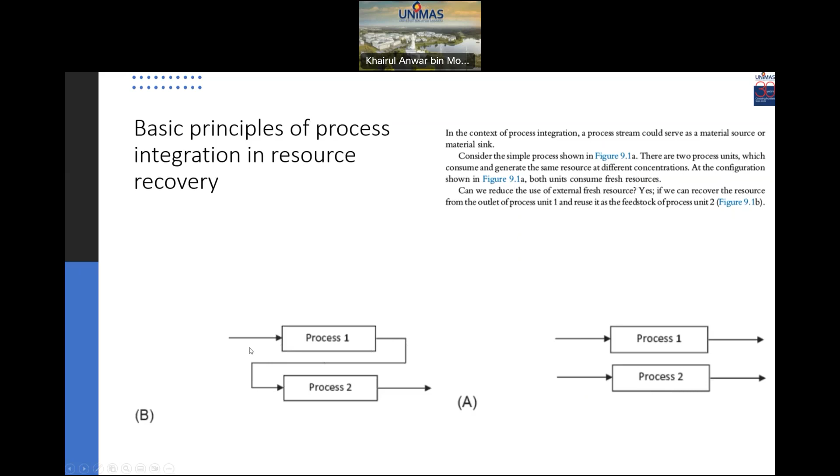Can we reduce the use of external fresh resource? Yes, if we can recover the resource from process unit 1 and reuse it as the feedstock of process unit 2. This process of reuse can result in a reduction of external fresh resource consumption. The inherent degree to which a particular resource can be reused can be determined using mass pinch analysis (MPA). The greater the amount of resource reused within a process network, the lower the external fresh resource required.

Furthermore, a material source stream can also be fed into a regeneration unit to improve the quality of the stream before recycling it or feeding it into another unit, as shown in figures 9.1c and 9.1d. These approaches for resource recovery were first introduced by Wang and Smith in 1994 for wastewater reduction, the principle of which can also be extended to gas and utility systems.

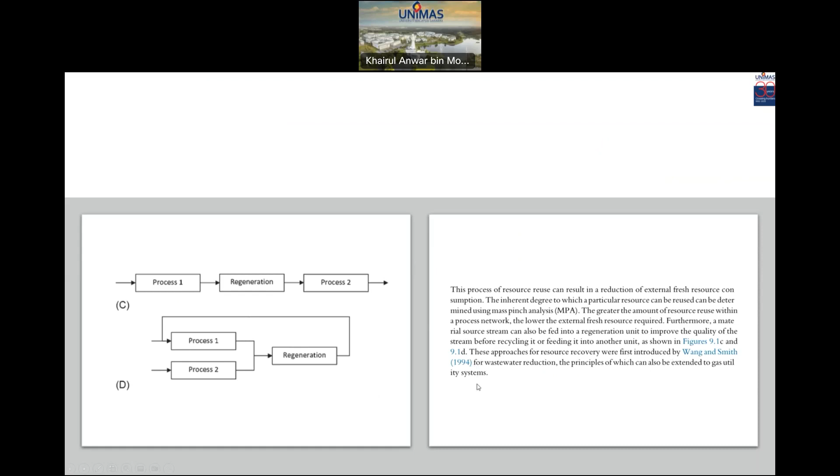Mass integration. Mass exchange underpins the concept of resource recovery. A mass exchange operation is important to recover the resource and limit or eliminate the source of pollutant. A typical example in process industry is when mass exchange process units are used to transfer the targeted undesirable species from a process stream, known as the rich stream, to a mass separating agent that acts as a receiving stream, known as the lean stream, based on the separating equilibrium.

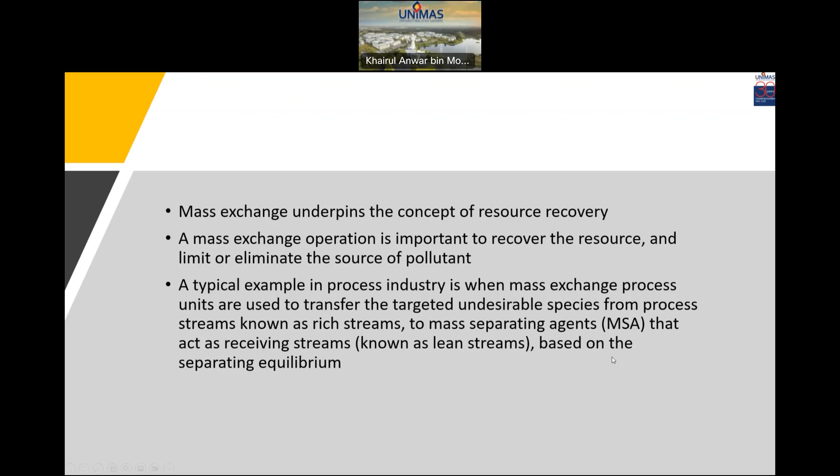Mass pinch analysis. There are 5 key steps of mass pinch analysis. The first one is plant audit on mass network: analyze the plant network of the targeted resources through plant auditing. Second, data extraction: identify the mass source and sink of the targeted resource with the potential to recycle and reuse. Third, target minimum resource: determine the minimum fresh resource required for the analyzed network.

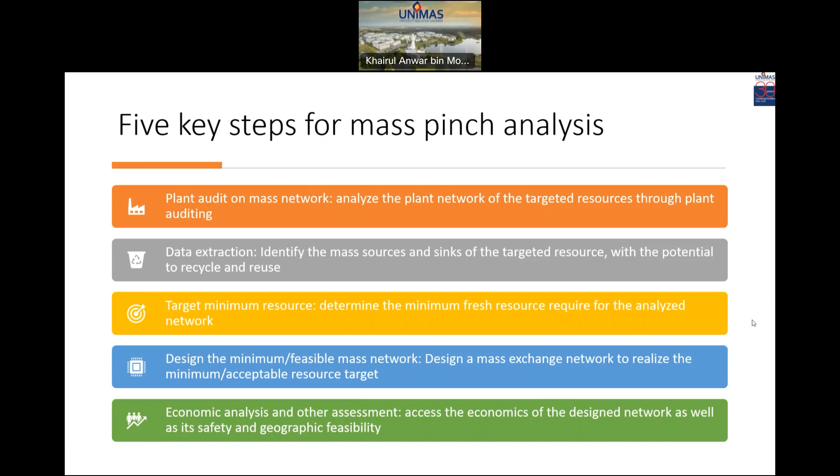Fourth, design the minimum feasible mass network: design a mass exchange network to realize the minimum acceptable resource target. The last one, economic analysis and other assessment, where you assess the economics of the designed network as well as the feasibility. This is the flow chart for mass pinch analysis. We have 5 steps here.

And reaching the 5th step, economic analysis and assessment: the feasibility of the design, the acceptable payback period, and design with safety and geographical constraints will be evaluated. If it's not feasible, you need to evolve and change the designed mass utility network. If it's feasible, then it's the final design.

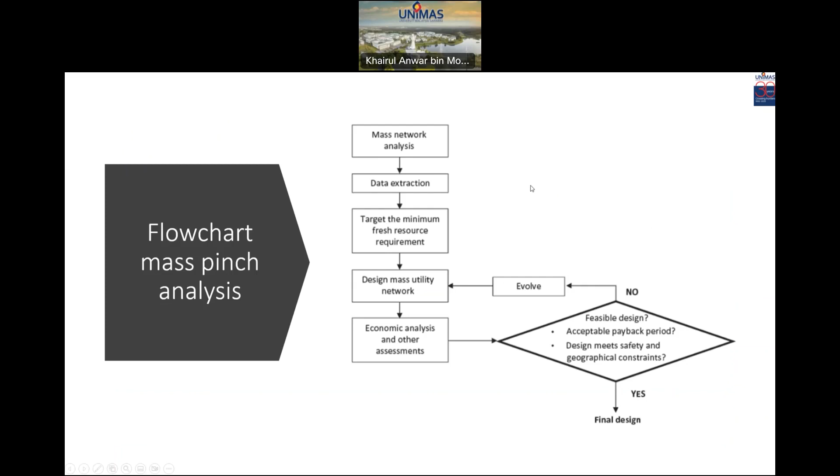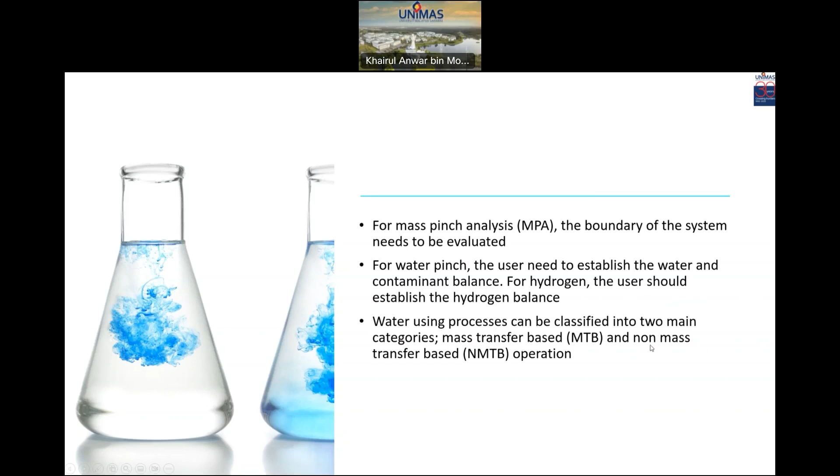Step 1. Plant audit on mass network. For mass pinch analysis (MPA), the boundary of the system needs to be evaluated. For water pinch, the user needs to establish the water and contaminant balance. For hydrogen, the user should establish the hydrogen balance. Water using processes can be classified into two main categories: mass transfer based and non-mass transfer based operations.

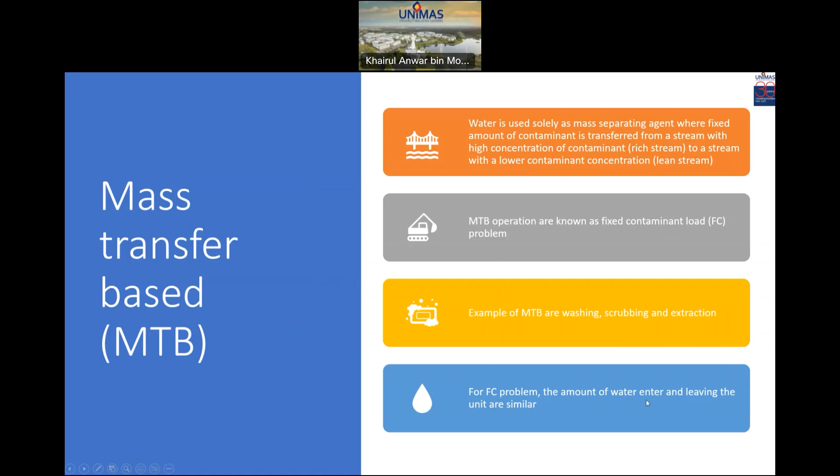So for mass transfer based, water is used solely as a mass separating agent, where a fixed amount of contaminant is transferred from a stream with high concentration of contaminant to a stream with a lower contaminant concentration. MTB operations are known as fixed contaminant load problems. Examples of MTB are washing, scrubbing, and extraction. For FC problems, the amount of water entering and leaving the unit are similar.

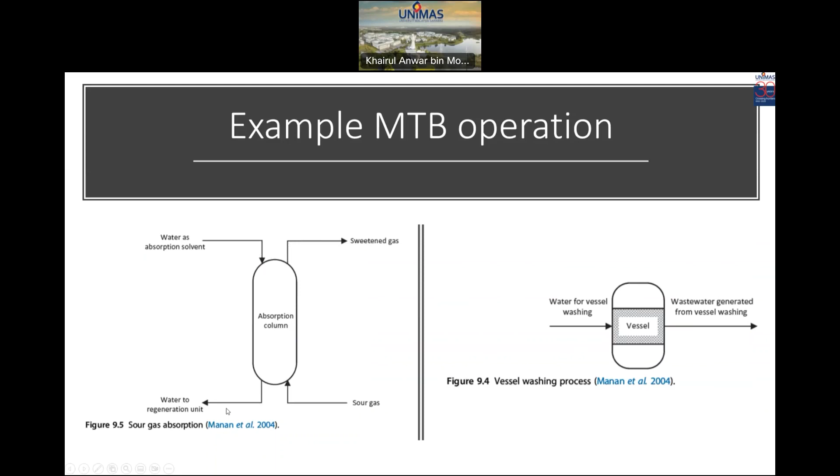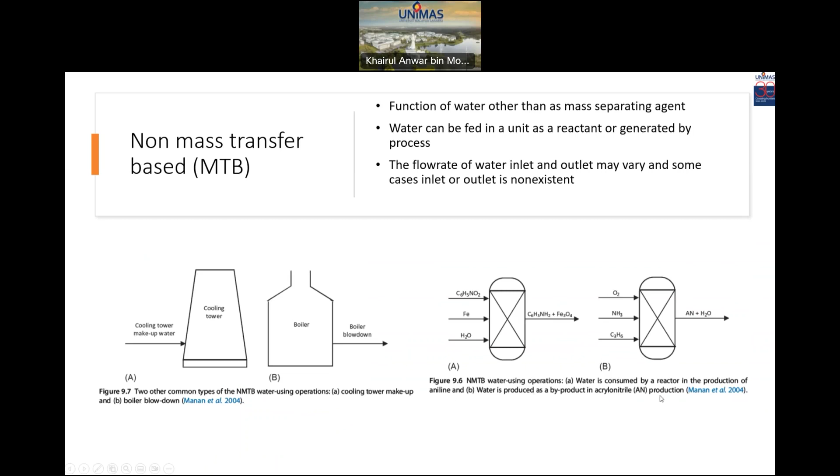Figure 9.6, an NMTB water using operation. In figure 9.6a, water is consumed by a reactor in the production of aniline as one of the reactants. In 9.6b, water is produced as a byproduct in acrylonitrile production. The inlet and outlet water streams are characterized as sink and source streams that consume or generate a fixed amount of water. This is similar to direct steam injection in heat exchange, which affects the overall heat and mass balance and acts as a direct supply of both heat and water.

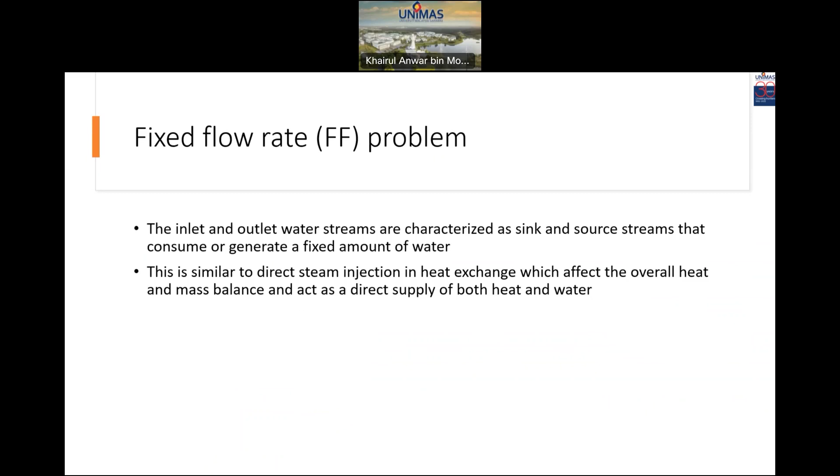Hydrogen distribution. For refinery hydrogen distribution, the three typical processes involve a hydrogen-consuming process (hydrotreater, hydrocracker), a hydrogen-producing process (catalytic reformer), and a hydrogen-purifying process (membrane separation, pressure swing adsorption, and cryogenic separation). All of these processes are NMTB operations, and hydrogen falls under the fixed flow rate problem. In general, the outlet streams of process units are the source streams, while the inlet streams are the demand streams. Again, this is similar to heat exchange, where the output product streams tend to be heat sources or hot streams, whereas input feed streams are usually sinks or cold streams.